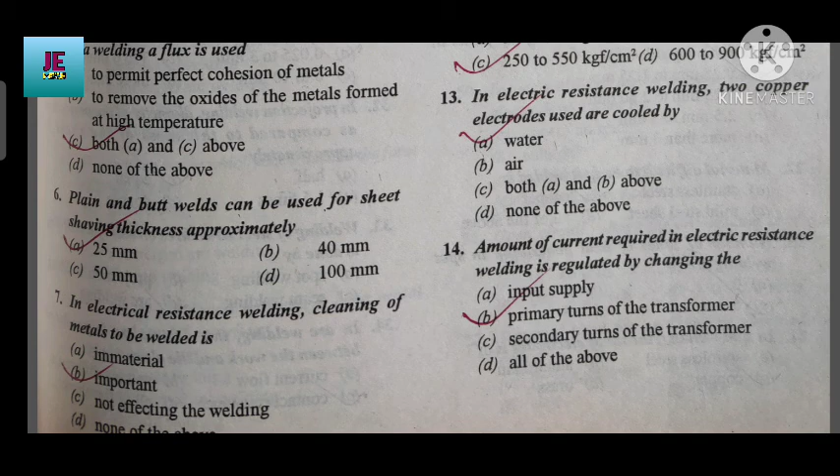Next, in electrical resistance welding, when the current passes through the metal, the greatest resistance is at the point of contact of the metal to be welded. Welding of chromium, molybdenum steels cannot use electric resistance welding.

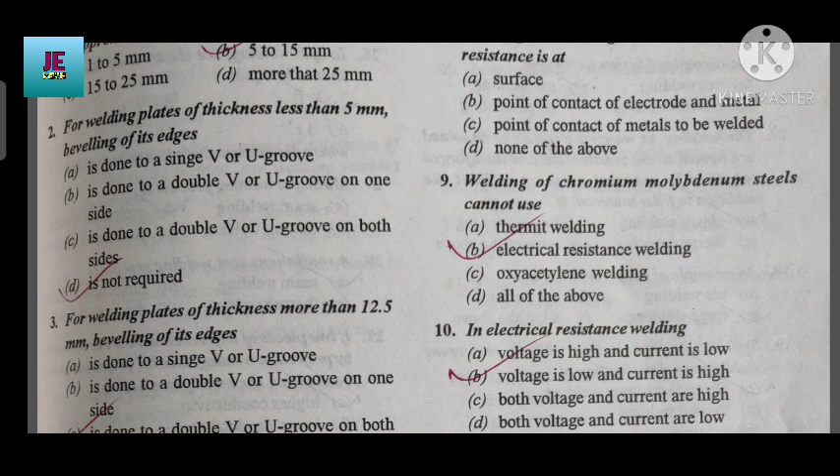In electric resistance welding, voltage is low and current is high. The voltage required for heating is in the range of 6 to 10 volts.

In electrical resistance welding, pressure applied varies in the range of 250 to 550 kgf per centimeter square.

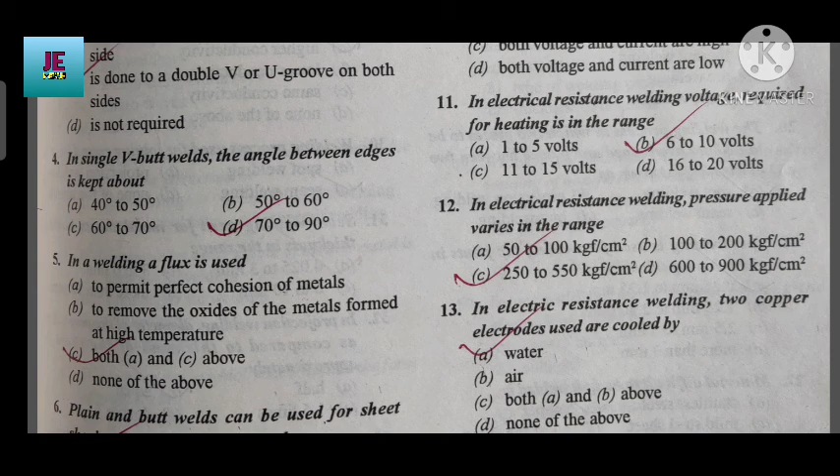In electric resistance welding, two copper electrodes used are cooled by water. Question 14: amount of current required in electric resistance welding is regulated by changing the primary turns of the transformer.

Question 15: welding in which the metal to be joined is heated to a molten state and allowed to solidify in the presence of filler material is known as fusion welding.

An example of fusion welding is gas welding. The welding in which the metal to be joined is heated to the plastic state and then forced together by external pressure without the addition of filler material is known as plastic welding. An example of plastic welding is forge welding.

Spot welding, projection welding and seam welding are classifications of electric resistance welding. The welding process in which two pieces to be joined are overlapped and placed between two electrodes is known as spot welding. Spot welding is used for welding lap joints in plates having thickness 0.25 mm to 1.25 mm.

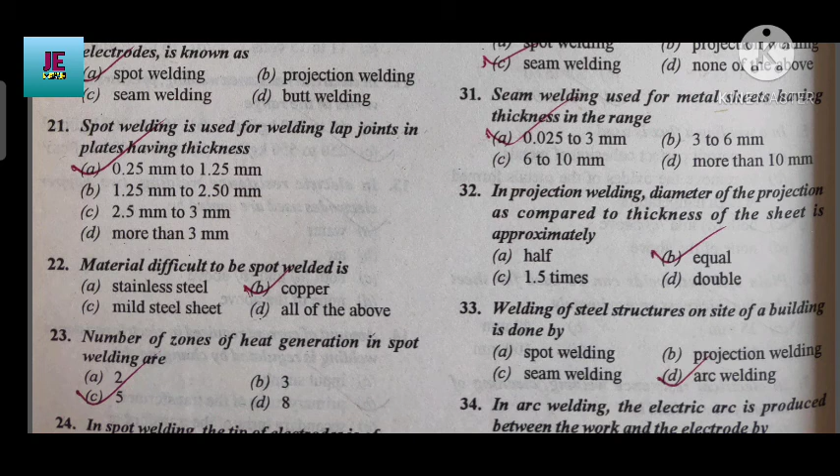Material difficult to be spot welded is copper. The number of zones of heat generation in spot welding is five. In spot welding, the tip of the electrode is made of copper.

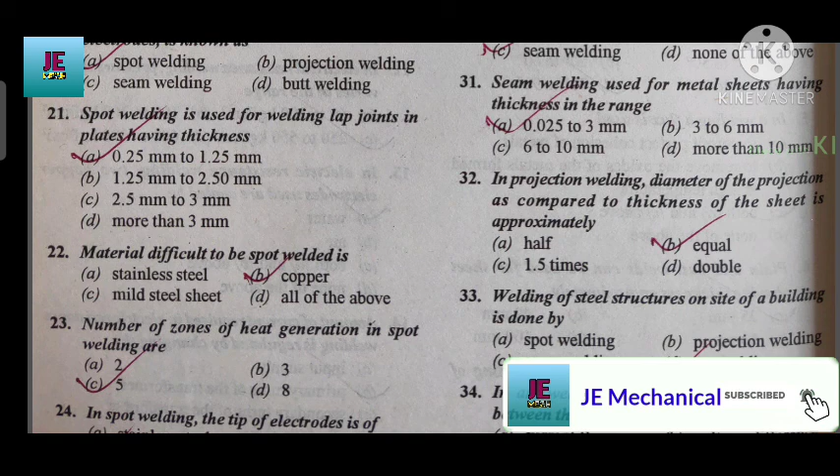Welding of steel structures on site of building is done by arc welding. In arc welding, the electric arc is produced between the work and the electrode by contact resistance.

Question 35: In arc welding, the temperature of the heat of arc is in the range of 6000 to 7000 degree centigrade. In arc welding, current used is DC current.

In arc welding, with increase of thickness of material to be welded, the welding current requirement increases. Question 38: In arc welding, too low welding speed results in...

Wastage of electrode, excessive piling up of weld metal, overhauling without penetration of edges - all of the above. Question 39: Welding preferred for joining thin foils is gas welding, X-ray and gamma ray, or microwave - the answer is microwaves.

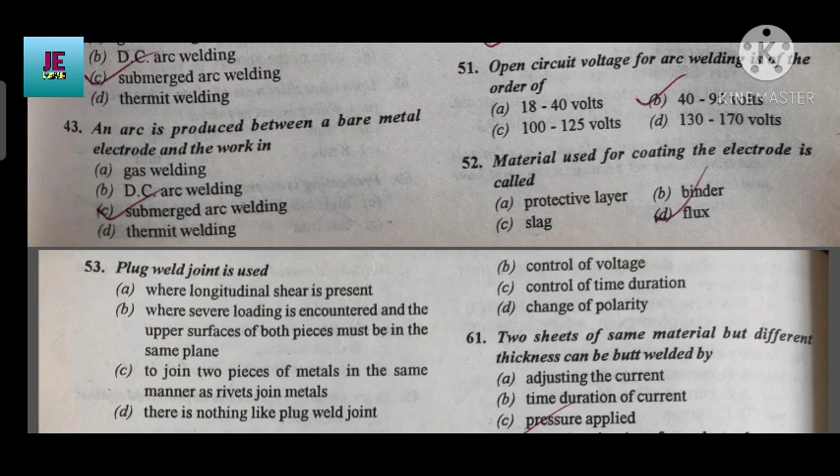Welding process using a pool of molten metal is submerged arc welding. Welding process in which flux is used in the form of granules is submerged arc welding. An arc is produced between the bare metal electrodes and the work is submerged arc welding.

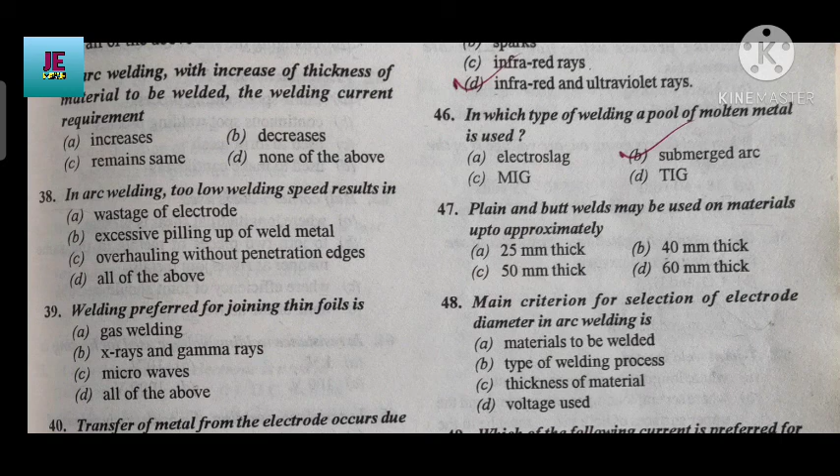Welded rod coated with fluxing material is used in shielded arc welding. In arc welding, eyes need to be protected against infrared and ultraviolet rays. In which type of welding a pool of molten metal is used? Submerged arc. Plain and butt welds may be used on materials up to approximately 25 mm thick.

Main criteria for selection of electrode diameter in arc welding is thickness of material.

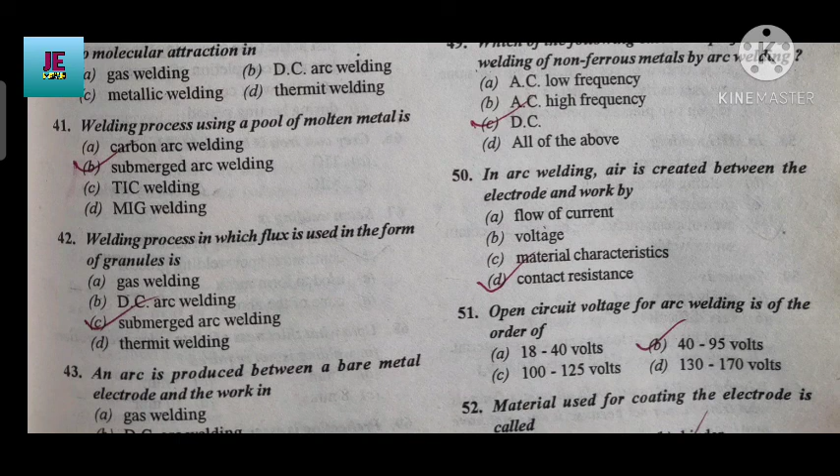Which of the following current is preferred for welding of non-ferrous metal by arc welding? DC. In arc welding, arc is created between the electrode and work by contact resistance. Open circuit voltage for arc welding is of the order of 40 to 95 volts.

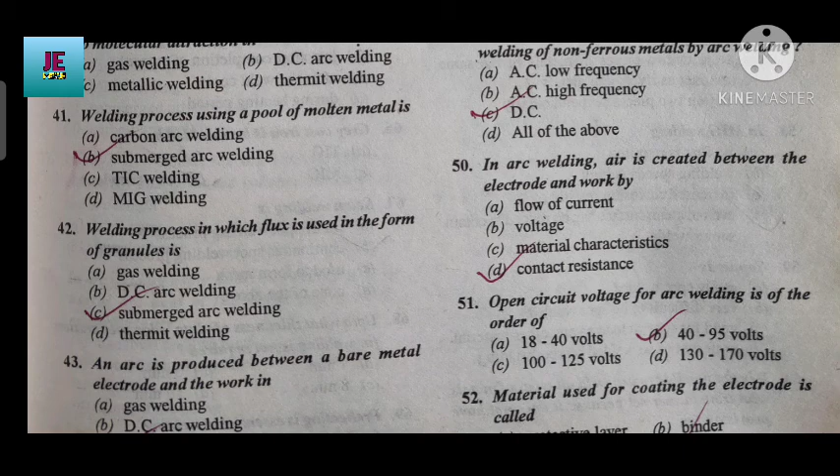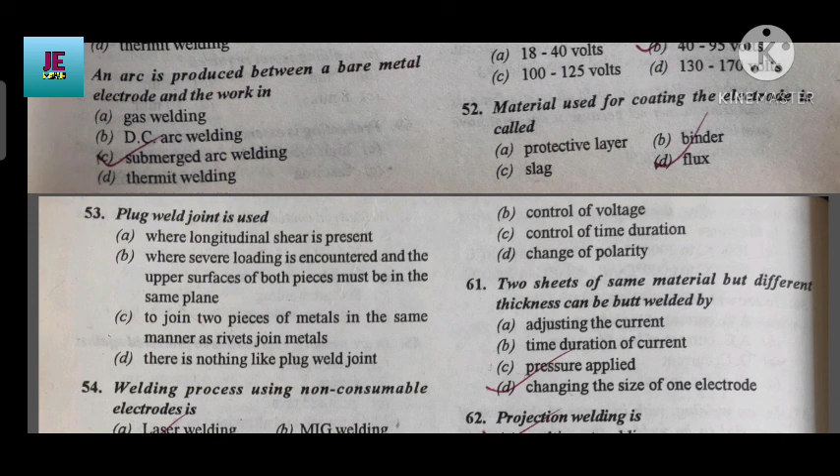Material used for coating the electrode is called flux. Plug weld joint is used to join two pieces of metal in the same manner as rivet joint metal. Welding process using non-consumable electrode is TIG welding.

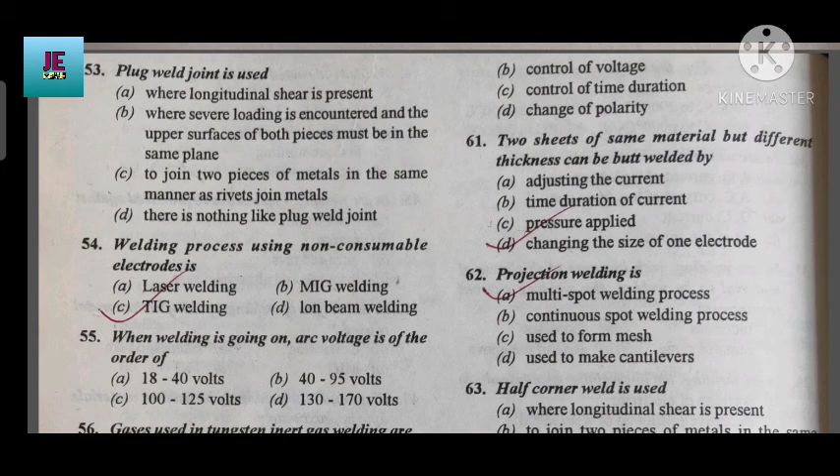When welding is going on, arc voltage is of the order of 18 to 40 volts. Gases used in tungsten inert gas welding are argon and helium.

T-joint weld is used where longitudinal shear is present.

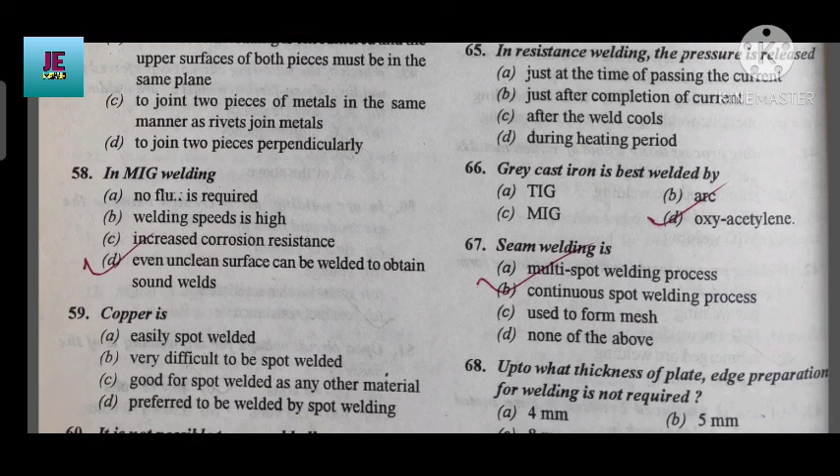In MIG welding, even unclean surface can be welded to obtain sound weld. Copper is very difficult to be spot welded.

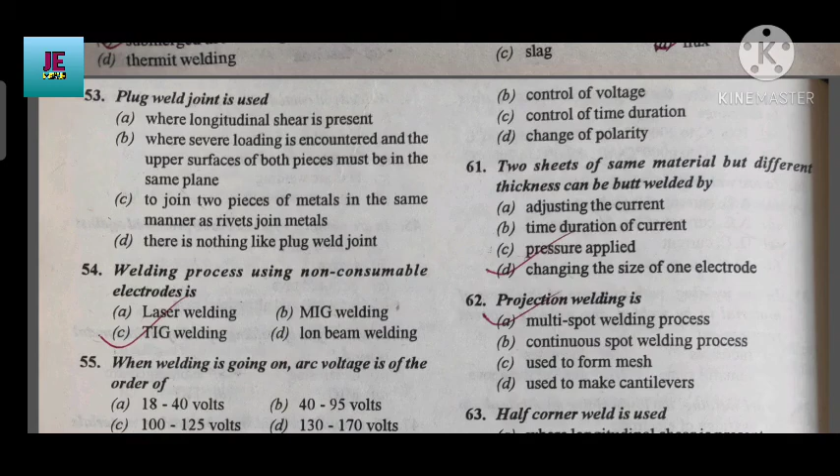It is not possible to arc weld all types of metal with a transformer set because it does not have provision for control of current, no control of voltage, no control of time duration, no change of polarity.

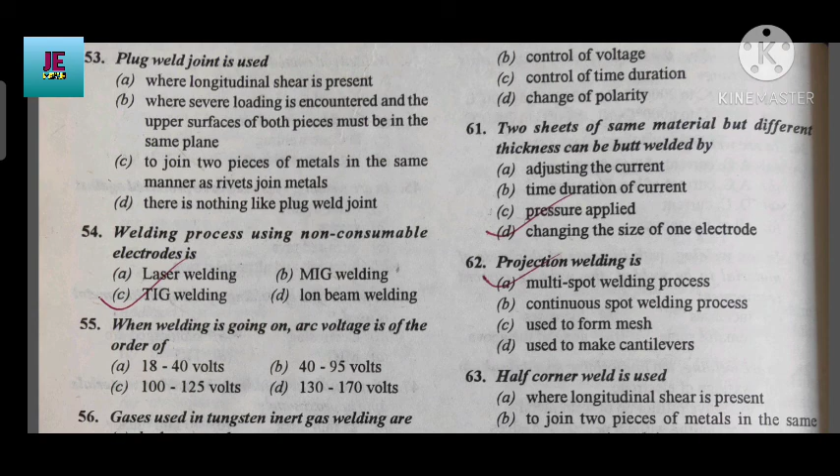Two sheets of same material but different thickness can be butt welded by changing the size of one electrode. Projection welding is a multi-spot welding process.

Half corner weld is used for none of the above.

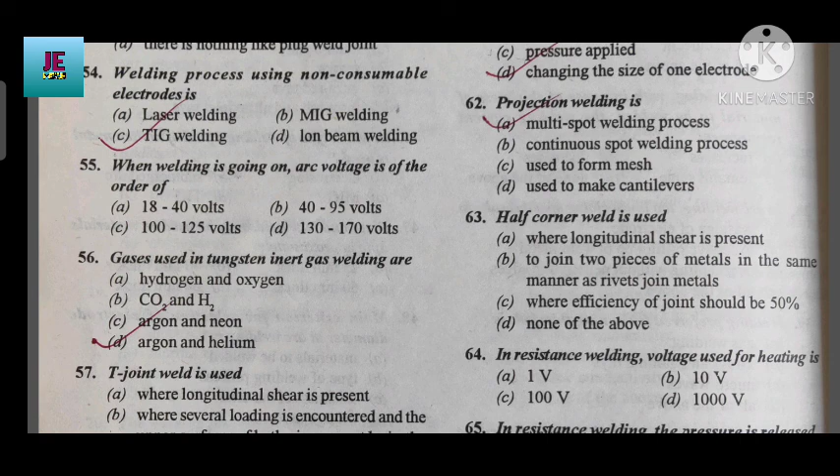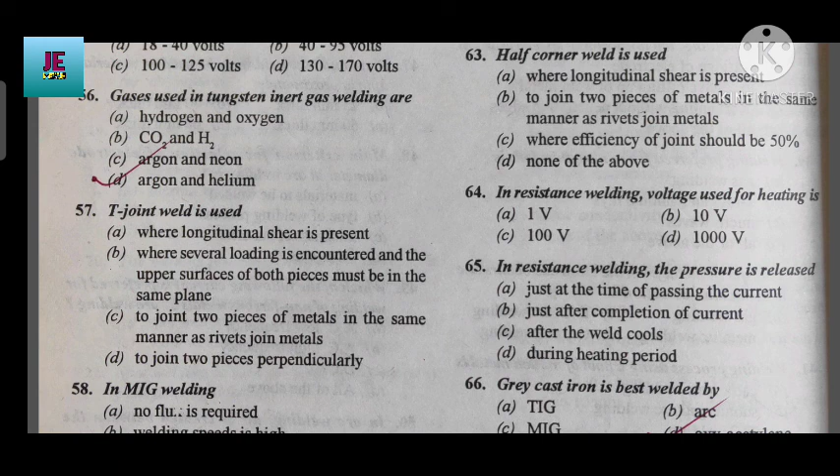In resistance welding, voltage used for heating is 10 volt. In resistance welding, the pressure is released after the weld cools.

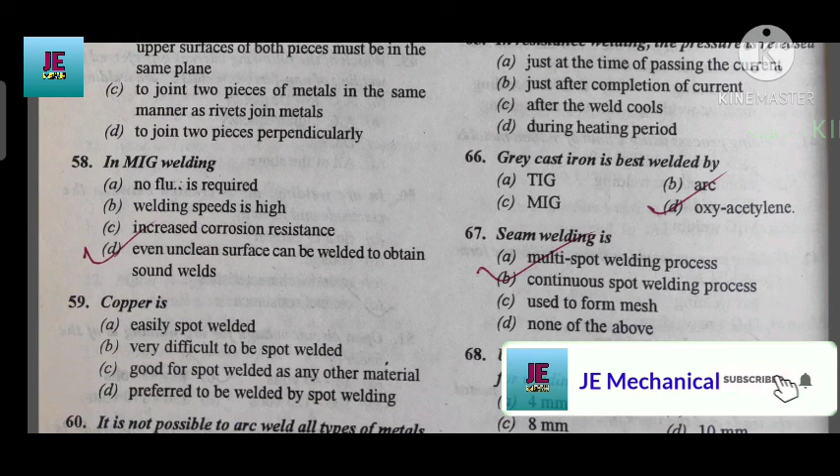Grey cast iron is best welded by oxyacetylene. Seam welding is a continuous spot welding process.

Up to what thickness of plate is the edge preparation for welding not required? 4 mm.

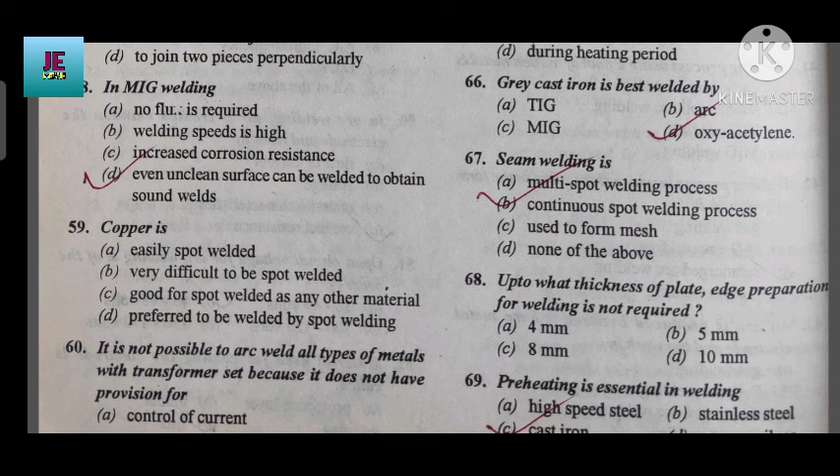Preheating is essential in welding cast iron. Grey cast iron is usually welded by gas welding. Brazing metals and alloys commonly used are copper, copper alloy, silver alloy — all of the above.

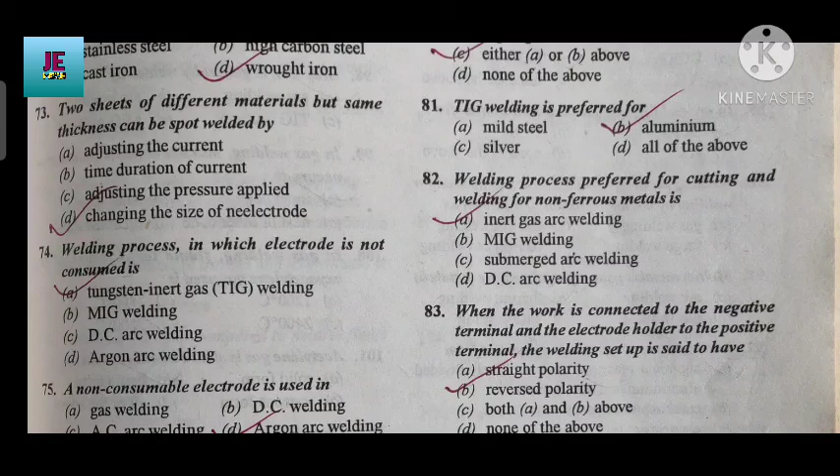Forge welding is best suited for wrought iron. Two sheets of different materials but same thickness can be spot welded by changing the size of electrode.

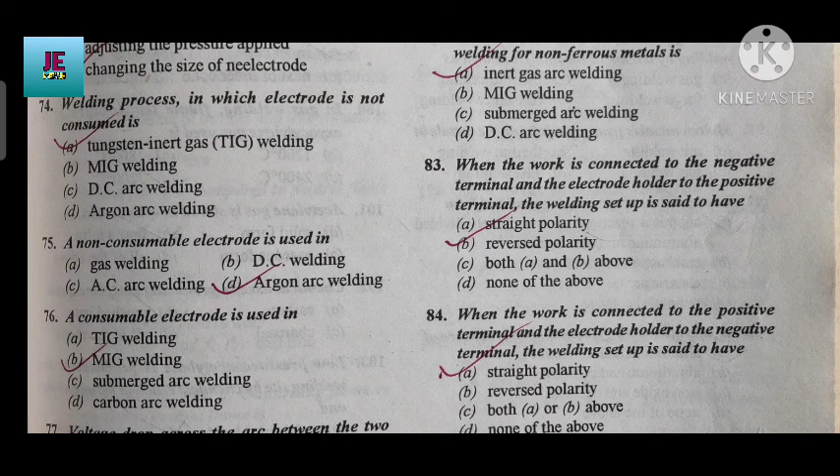Welding process in which electrode is not consumed is tungsten inert gas welding. A non-consumable electrode is used in argon arc welding. A consumable electrode is used in MIG welding.

Voltage drop across the arc between the two electrodes, known as arc voltage, increases as the arc length increases.

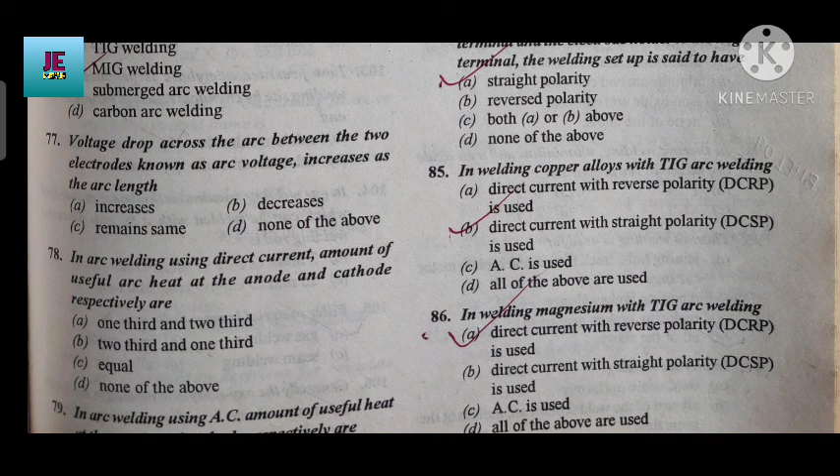In arc welding using direct current, the amount of useful arc heat at the anode and cathode respectively are 2/3 and 1/3.

In arc welding using AC, the amount of useful heat at the anode and cathode respectively are equal. In TIG arc welding, the welding zone is shielded by an atmosphere of either helium gas or argon gas.

TIG welding is preferred for aluminium, mild steel, silver, or all of the above. The answer is aluminium. Welding process preferred for cutting and welding of non-ferrous metal is inert gas arc welding.

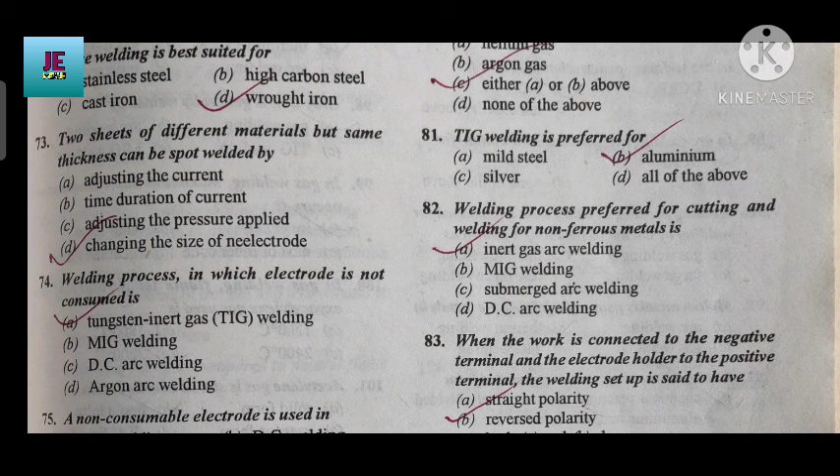When the work is connected to the negative terminal and the electrode holder to the positive terminal, the welding setup is said to have reverse polarity.

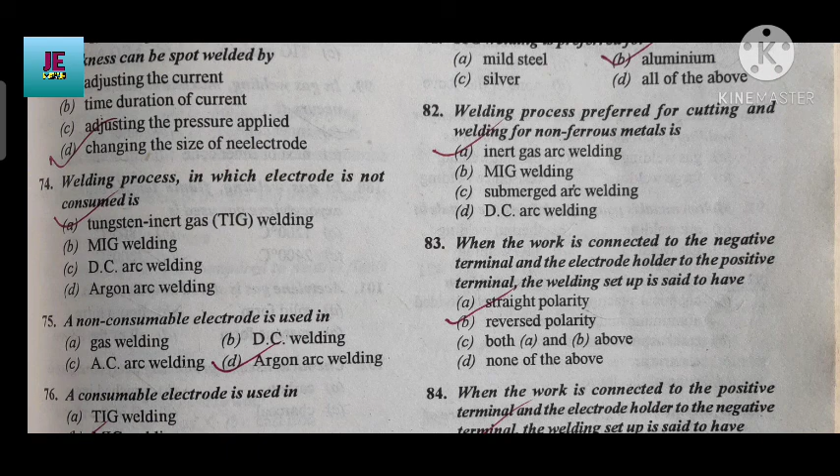When the work is connected to the positive terminal and electrode holder to the negative terminal, the welding setup is said to have straight polarity. In welding copper alloy, TIG welding uses direct current with reverse polarity.

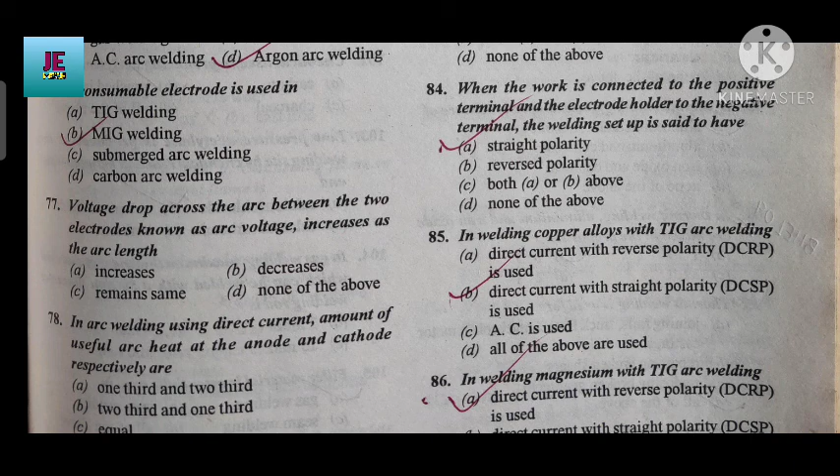Direct current with straight polarity, AC, or all of the above? Answer is direct current with straight polarity is used. In welding magnesium with TIG welding, direct current with reverse polarity is used.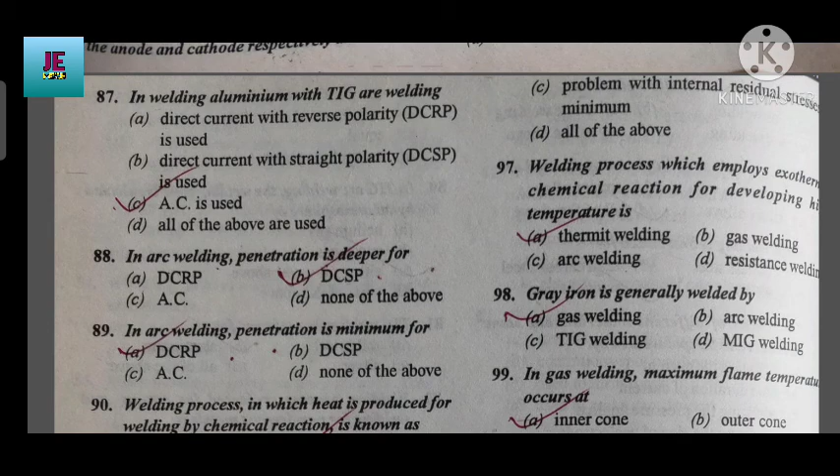Question 87: In welding aluminium with TIG arc welding, AC is used.

In arc welding, penetration is deeper for DCSP (direct current straight polarity). In arc welding, penetration is minimum for DCRP, meaning direct current reverse polarity.

Welding process in which heat is produced by chemical reaction is known as thermit welding. Molten metal is poured for joining the metal in thermit welding.

Question 92: In thermit welding, heat is generated from chemical reaction involving finely divided aluminium and iron oxide. The thermit used is a mixture of aluminium and iron oxide.

In thermit welding, aluminium and iron oxide are mixed in the proportion of 1:3. That means aluminium is 1 part and iron oxide is mixed as 3 parts, in ratio 1:3.

Thermit welding is used for joining rails, truck frames, broken motor casting, repairing broken shear, replacing broken gear teeth, or all of the above. In thermit welding, weld is cooled uniformly, and all parts of weld section are molten at the same time.

The problem with internal residual stresses is minimum, or all of the above. Answer is all of the above.

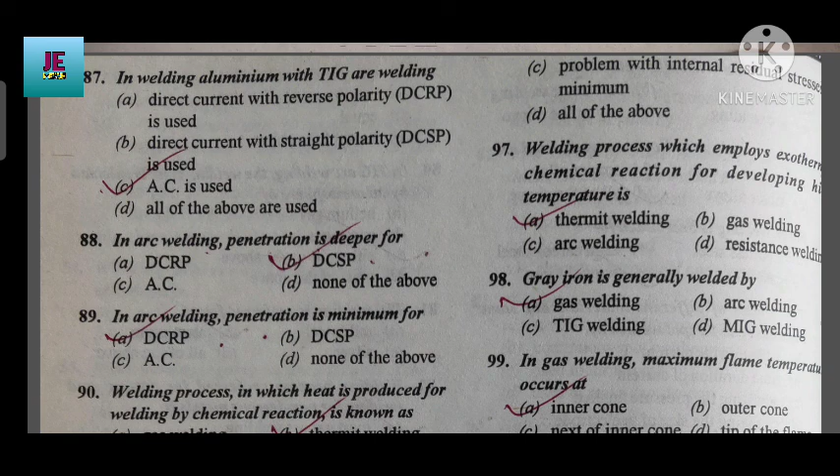In gas welding, maximum flame temperature occurs at the inner cone. In gas welding, flame temperature of the oxyacetylene gas is 3200 degree centigrade.

Low pressure acetylene is produced at the welding site by chemical reaction between water and calcium carbide.

In gas welding, the maximum thickness of material which can be welded with a 30 mm diameter welding rod is 3 mm.

Filler material is essentially used in gas welding. Generally, oxyacetylene welding is done with the neutral flame.

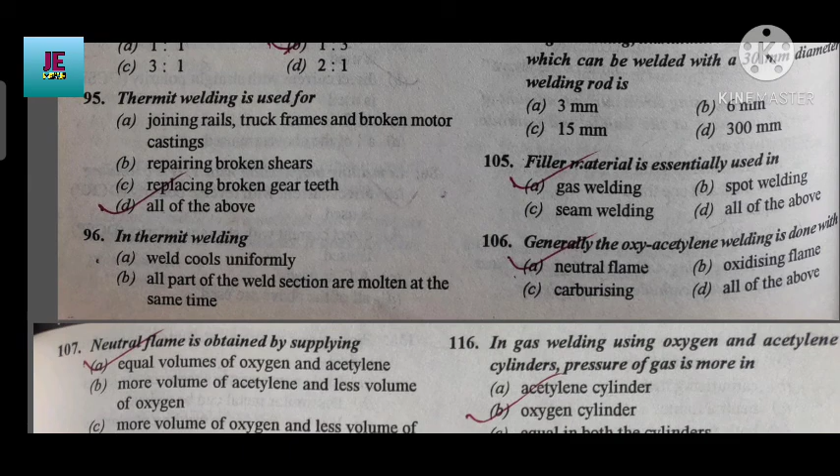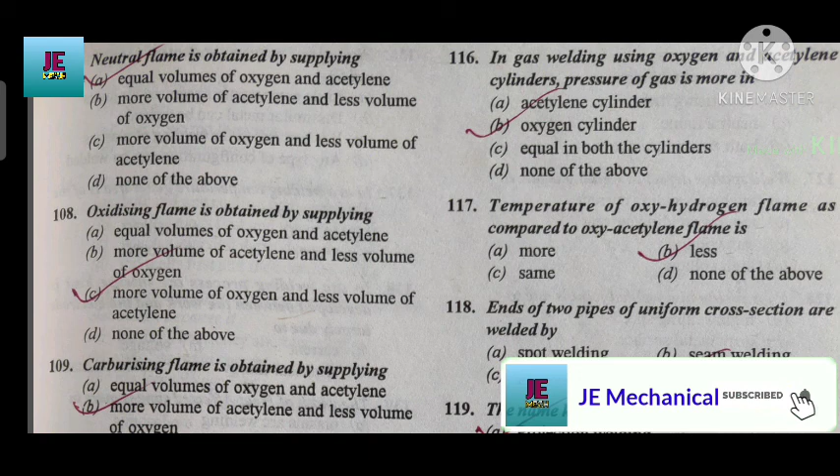Question 107: neutral flame is obtained by supplying equal volume of oxygen and acetylene. Oxidizing flame is obtained by supplying more volume of oxygen and less volume of acetylene. Carburizing flame is obtained by supplying more volume of acetylene and less volume of oxygen.

Oxidizing flame compared to neutral flame has an inner core that is less luminous and shorter, meaning both A and B are correct.

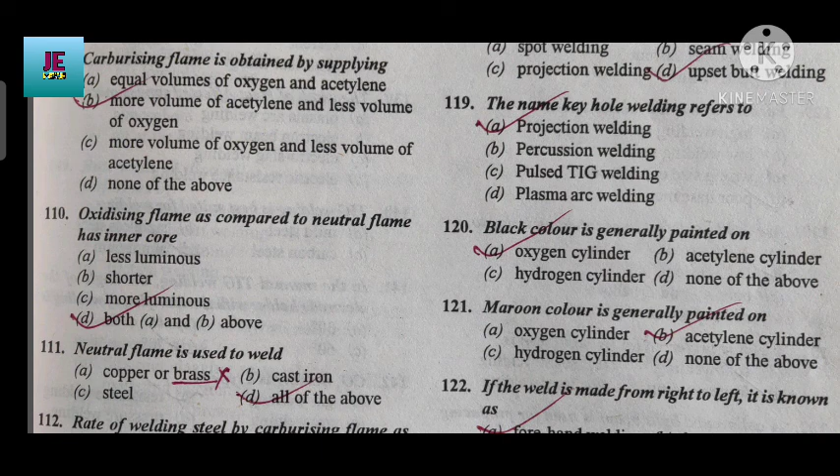Neutral flame is used to weld copper or brass, cast iron, steel, or all of the above? All of the above. Rate of welding steel by carburizing flame compared to neutral flame is more.

Oxidizing flame is used to weld brass, copper, bronze, or all of the above? All of the above.

Carburizing flame is used to weld steel, copper etc., brass and bronze, hard surfacing materials such as stellite, or all of the above.

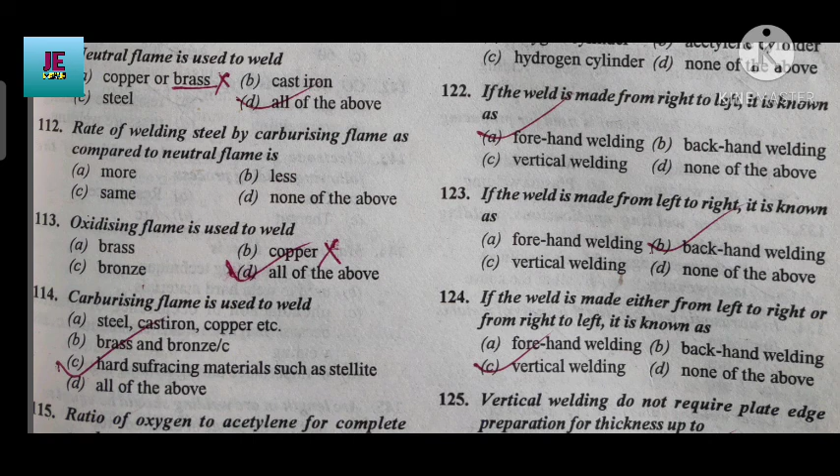Answer is C. Ratio of oxygen and acetylene for complete combustion is 2.5:1.

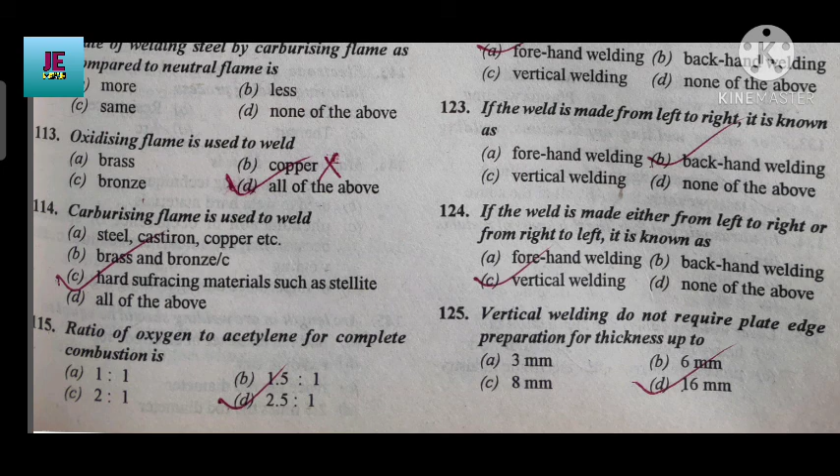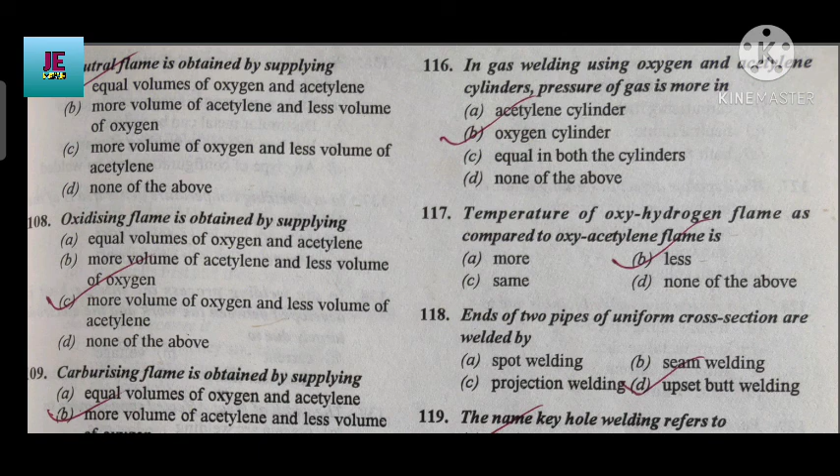Question 116: in gas welding using oxygen and acetylene cylinder, pressure of gas is more in the oxygen cylinder. Temperature of oxy-hydrogen flame compared to oxy-acetylene flame is less.

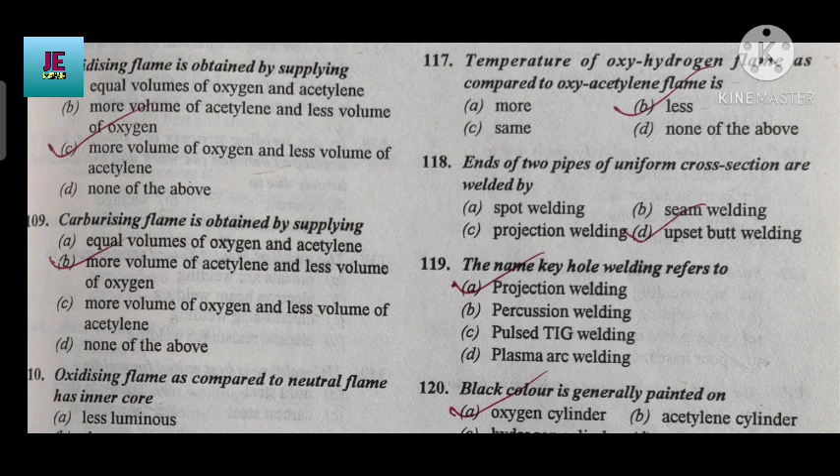Ends of two pipes of uniform cross section are welded by upset butt welding. The name keyhole welding refers to projection welding.

Black color is generally painted on oxygen cylinder. Maroon color is generally painted on acetylene cylinder.

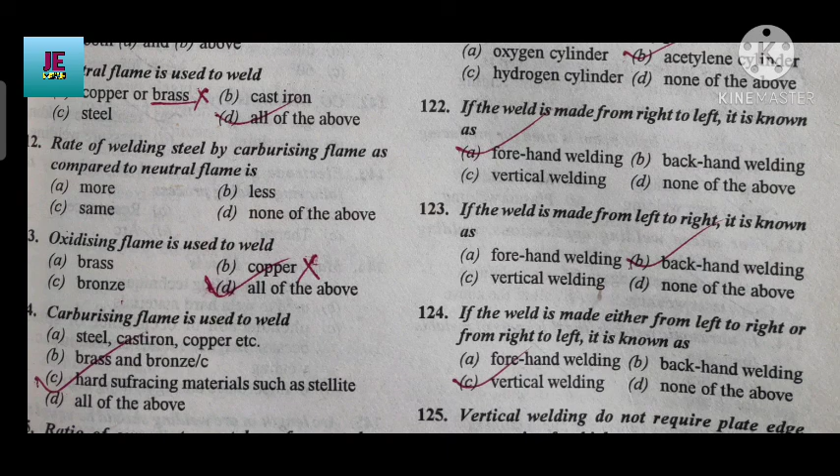If the weld is made from right to left, it is known as forehand welding. If the weld is made from left to right, it is known as backhand welding. If the weld is made either from left to right or right to left, it is known as vertical welding. Vertical welding does not require plate edge preparation for thickness up to 16 mm.